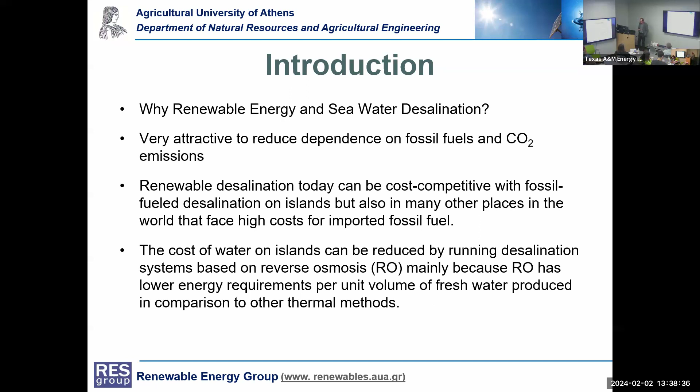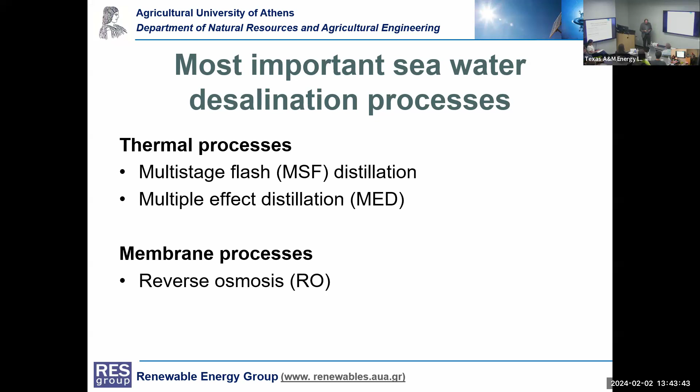The well-known MSF distillation, already implemented for many years, and the distillation principle is, of course, the way of working with thermal processes, and MED. Hundreds of thousands of cubic meters a day of fresh water are still produced in the Gulf and in many other areas, mostly in the Arab countries, with these methods, but not anymore. Because today, the major process in the new systems installed in several areas in the world is mostly reverse osmosis. And I will explain why.

There are also some other processes, but I'm not going to discuss them. Just to explain what reverse osmosis is, you probably know about osmosis. Here, pure water goes through a semi-permeable membrane to this side, where the concentrated solution is. But if you apply a pressure on this side, then you have the reverse process, and water molecules pass through the membrane to the other side. And in this way, you produce fresh water while you have concentrated solution left on the other side. So this is what we do with reverse osmosis.

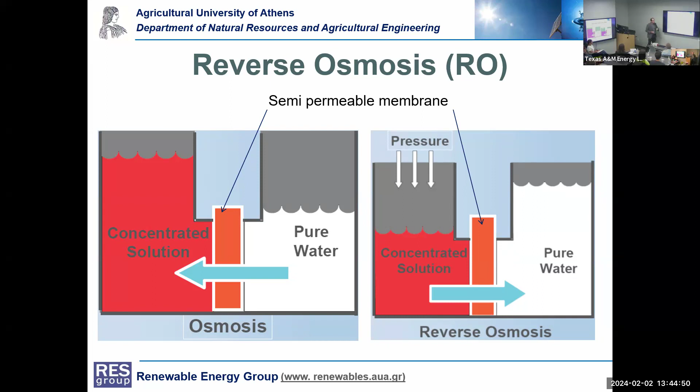And of course, you need pressure, which means energy. So you have to overcome the osmotic pressure in order to produce fresh water. So that's a typical arrangement today of a reverse osmosis system. You have the feed here, feed pump, and then the high pressure pump here. Well, I will explain more about this system here, because this is a very clever system developed something like 10, 15 years ago, the so-called pressure exchanger, in order to reduce the energy consumption of this system.

And this is the membrane module, and you have the saline water here, seawater, for example, and then on the other side you get the fresh water, while here you get the concentrated brine, which is still of high pressure. So you use the system to recover most of the energy contained in the brine. And this way you recover energy and you reduce the overall energy consumption in the system.

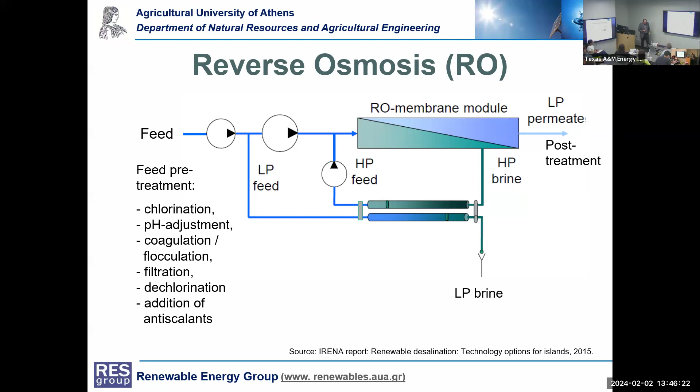Of course, there are also other processes associated, like feed pretreatment or post-treatment of the water. Mostly chemicals are here, but it's not our scope to discuss this today. So as I mentioned, desalination is an energy-intensive process. So you see here the energy consumption in kilowatt hours per cubic meter.

When you want to produce 1 cubic meter of fresh water, you see that if you get water from a lake or groundwater, you need some pumping, or wastewater treatment and reuse. You see how low the average energy consumption is. So if you have water resources, it's foolish to go to desalinated water because its cost is too high.

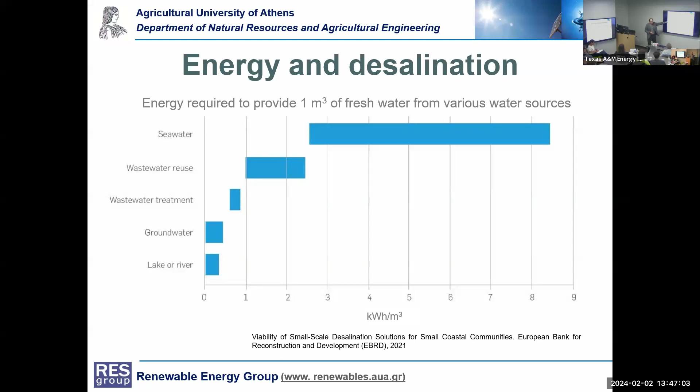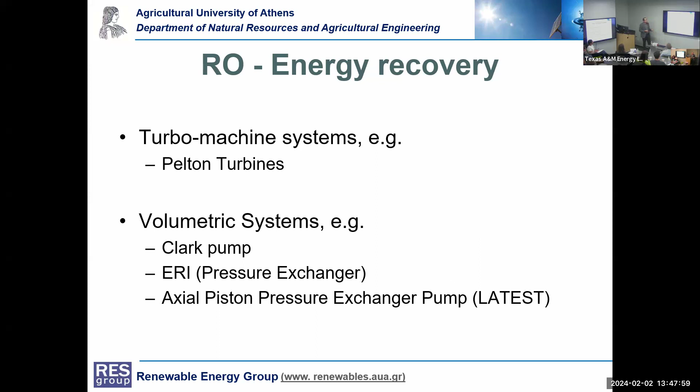Now, how did we manage to reduce the energy consumption specifically for the reverse osmosis systems? There are several systems developed and used today. The first system to recover energy was the system of Pelton turbines, but later on, something like 15 years ago, we had the development of several volumetric systems like the Clark pump that we have been working with, a small system in the laboratory, the pressure exchanger that I showed you before, and the latest system is this axial piston pressure exchanger pump, which is also working very well and managed to reduce the energy consumption quite impressively.

Now, this is the operational principle of the hydraulic energy recovery. This is the Clark pump. So you have the membrane, you need high pressure, and then you get the brine, which is also of high pressure. Let's say that you have here 70 bars. Here you will get something like 68. And then this high pressure is used to move this piston. And in this way, by using this two-way piston as you see, you actually help provide energy to the feed water to drive the salty water, the feed water, to the membrane.

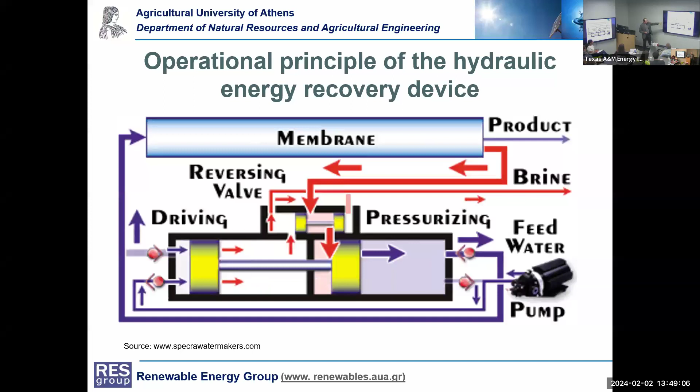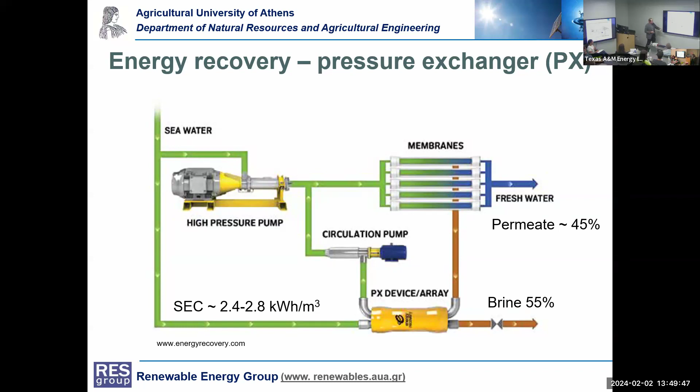So in this way, you recover a lot of energy contained in the brine and you reduce the overall energy consumption. It was a patent by this company at that time for small systems, for yachts, for example, or domestic systems. And then a couple of years later, this pressure exchanger system was developed, the so-called PX, which managed to reduce the energy consumption down to 2.4, 2.8 kilowatt hours per cubic meter. And that was a big revolution in desalination technologies at that time. This system still, of course, exists, commercially available, and in many systems this PX exchanger is installed.

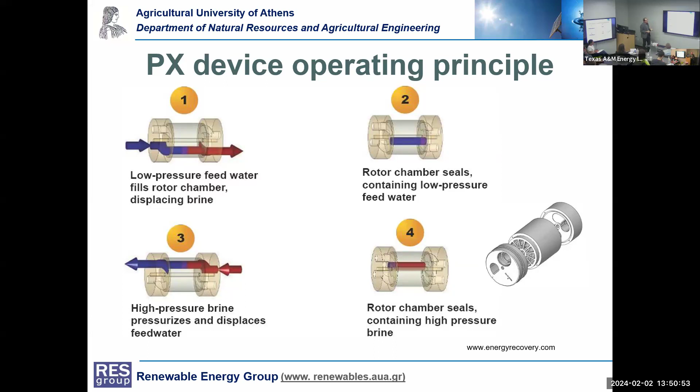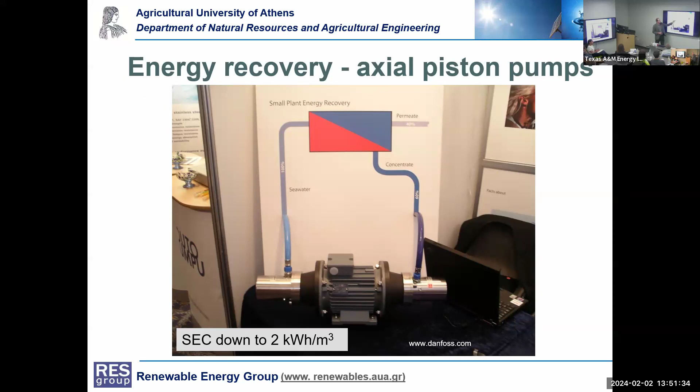With this system, the energy consumption was reduced, and another very smart system is this one, where you have the high pressure pump on the same axis with a very similar pump. These are positive displacement pumps, and one works as a pump and the other one as a turbine. So you get the concentrate here, the brine, and it's the same principle: it helps this pump because it gains energy on the same axis to pump the water towards the membrane.

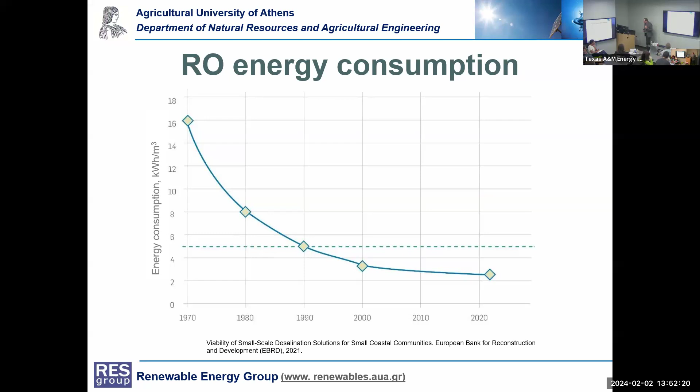And here you see over several years the impressive reduction of energy consumption in reverse osmosis systems, especially in this area. You see how low we are now, below 2 kilowatt hours per cubic meter for the system itself, not the overall consumption, because you have several accessories and other apparatuses that consume energy. But the system itself today, we managed to go down to below 2 kilowatt hours per cubic meter.

And if you compare this consumption with other technologies, you see that the membrane technology, reverse osmosis, now has the lowest energy consumption. And this is the reason why practically all new systems installed everywhere in the world are now reverse osmosis. Another advantage of the technology is that it is modular. So you may install a small system of, let's say, 1 cubic meter a day for a house near the sea, or you can have a very large system of 50,000 cubic meters a day by adding more and more modules. That's a big advantage.

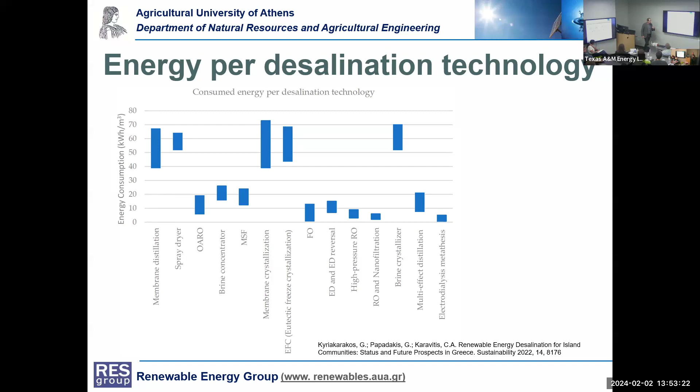Now, regarding the combination of reverse osmosis mostly, or other desalination technologies, with renewable energy, there have been many research trials and demo trials. Many pilot systems have been installed and tested all over the world, trying to combine thermal technologies with many different renewable energy technologies and sources, like geothermal energy, of course solar energy, not only electricity production technologies like photovoltaics, but also thermal technologies, and also others, like vapor compression.

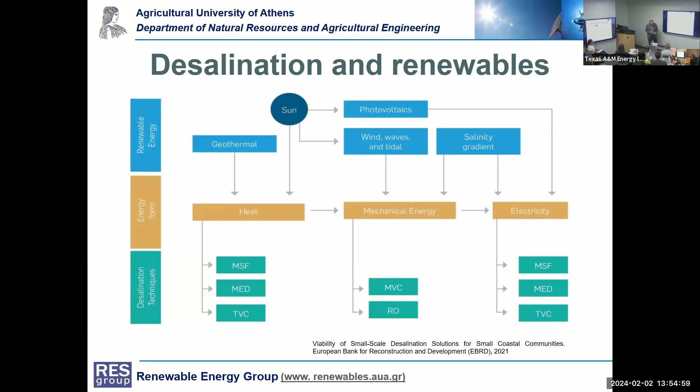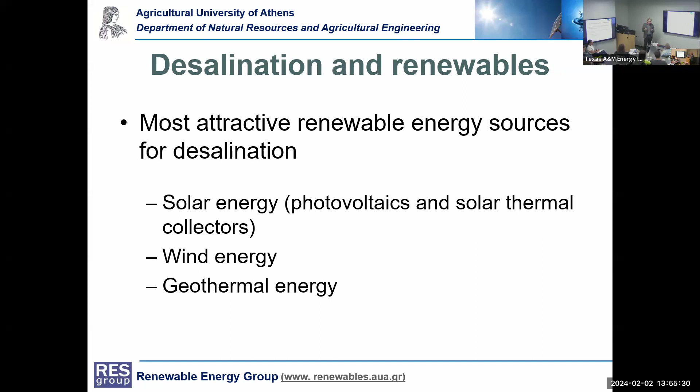However, after all these research and demonstration trials, it seems that photovoltaics or wind, and specifically electricity production renewable energy technology, seems to be the most appropriate for providing power to reverse osmosis, which is now the dominant technology in the world. Nevertheless, when you have available geothermal or another source of free heat, as Professor Hassan mentioned yesterday, then of course you have to consider technologies other than reverse osmosis.

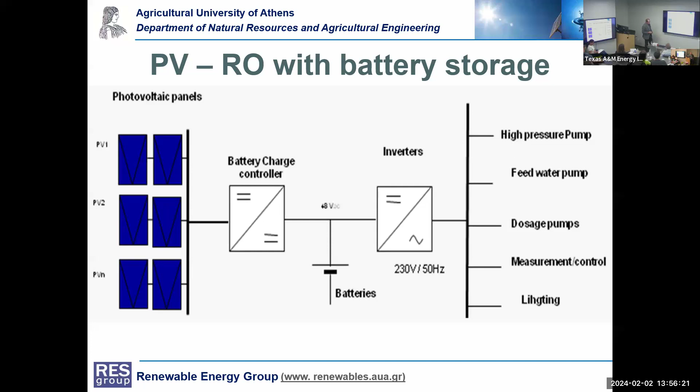Now, this is a typical layout of a combination of PV and RO. We have the panels, we have a battery charger. You may charge the batteries, and then you have the inverter, and then you have the loads. This part is really typical. It's a typical autonomous photovoltaic system, and you combine the load, which is a reverse osmosis system. So there is nothing innovative about that, but it has been used today in many places in the world for small-scale autonomous systems, not connected to the grid.

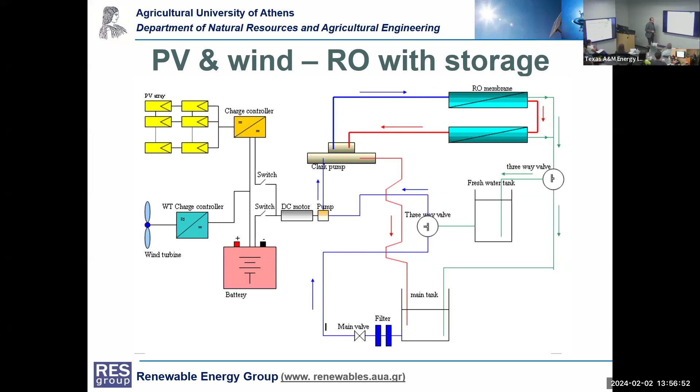In the laboratory, we have been testing photovoltaics and small wind, with all kinds of combinations, with a DC motor or through a Clark pump for energy recovery, to test the reverse osmosis system. But we have also participated in several research projects in many places in the world, including Europe, but also North Africa. This system, one of the first installed some 10 years ago, was for brackish water, not seawater, inland in a village in Morocco.

And you know what is the problem there? The problem is how to treat the brine. If you have a system near the sea, there's no problem. You just return the brine to the sea. Of course, there are standards and knowledge on how to do that without any impact on the sea environment. But generally, there is no problem getting rid of the brine in the sea. But here you do have problems. So this is still an unsolved problem for large quantities of water.

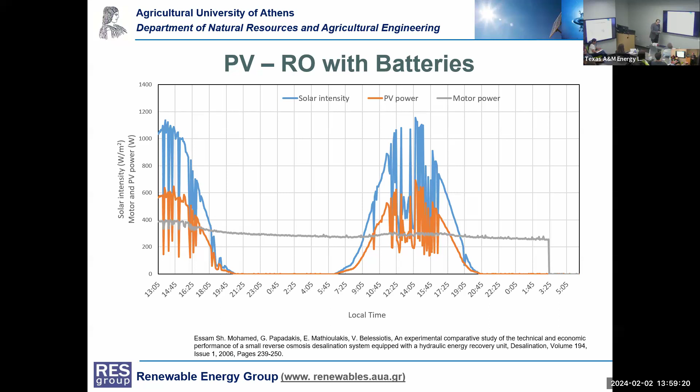So when you combine PV with RO, batteries are still expensive. If you want to lower the cost of fresh water, you might want to get rid of the batteries. So we started doing tests with a battery. Solar radiation intensity is the blue, PV power for a small system, and this is the motor power of the desalination system. You provide all the energy by the battery, so if you have enough battery, the system can operate even for 24 hours. But the idea is, let's suppose you install a reverse osmosis system without a battery and pump the water you need when the sun is available. So you store water instead of storing electricity.

Then what will happen? It's inevitable that the motor power will follow the available power from the PV system, so you have these variations in operation. And the inlet membrane pressure also varies and practically follows the available power. According to the membrane manufacturers, this is not good for the membrane. But nobody has proven that. And Vangelis is still working on that with some cells. He didn't give many details in his presentation, but you can discuss more with him if you are interested.

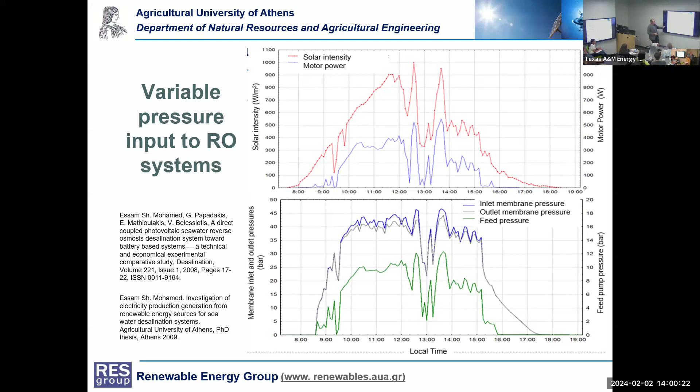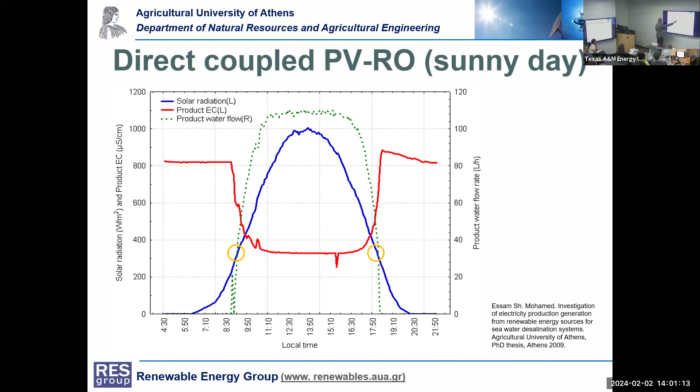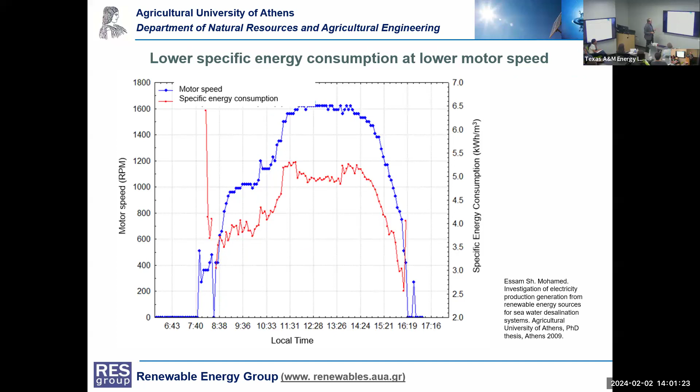Now, there are also other issues when you don't have a battery. The system starts late because there is not enough power in the morning to operate the motor, and also stops at sunset. The motor will operate at its nominal power at a certain point of the day, and you will have some energy that is lost during that time. On a nice sunny day, you will have more power available than the motor requires. So you have to do something about that, and what we thought is to include a kind of buffer for the system to operate.

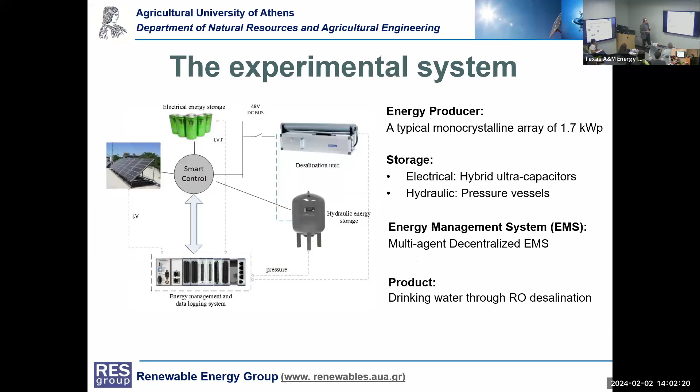So we actually tested an electrical buffer, but we didn't use conventional batteries at that time, lead acid, but we chose to use hybrid capacitors with small storage, exactly to smooth out these fluctuations, and also a hydraulic pressure buffer with pressure vessels, and developed a special control system to operate the reverse osmosis system at the optimum point, depending on the energy available from the photovoltaic system.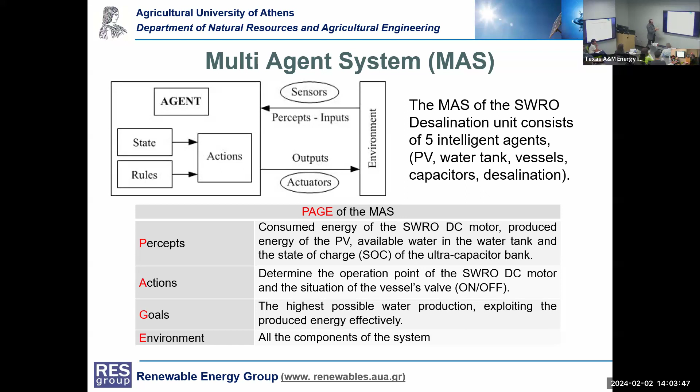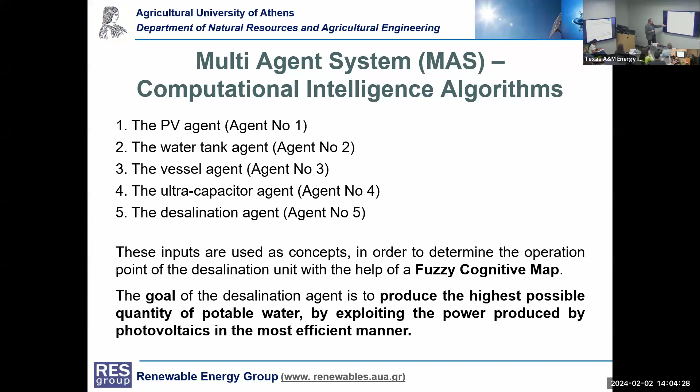And we have used computational intelligence algorithms. So the several agents, the PV, the water tank, because you remember that the idea is to store the available energy in a tank, in water, and provide that water during the hours that there's no sun, there's no energy. And with this system, we managed to operate the system in a very effective way, I would say. So I give you some results shortly for a clear day and a cloudy day.

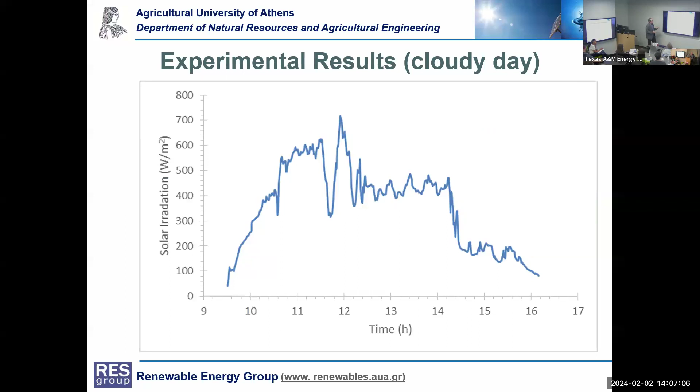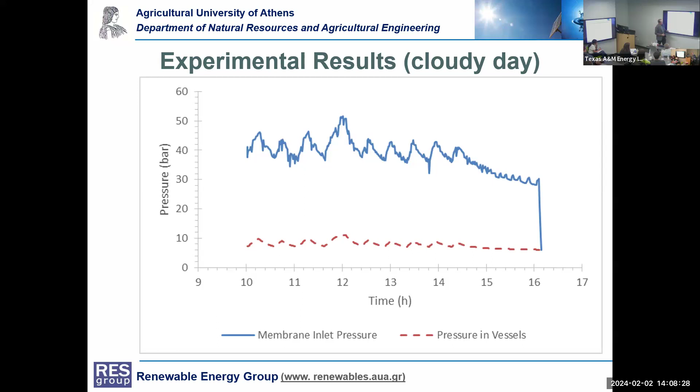And this is the variation of the conductivity, which is within, let's say, acceptable limits during the daytime. So it produces water that can be potable. And now you see that in this case, there is some energy provided by the vessels, the red line.

And what about the energy consumption? You see it's quite high for this small system; well, this was expected. So during a clear day, you have production of something like 550 liters, while during the cloudy day, of course, lower. But the energy consumption is very close during these 2 days. And that's the energy consumption.

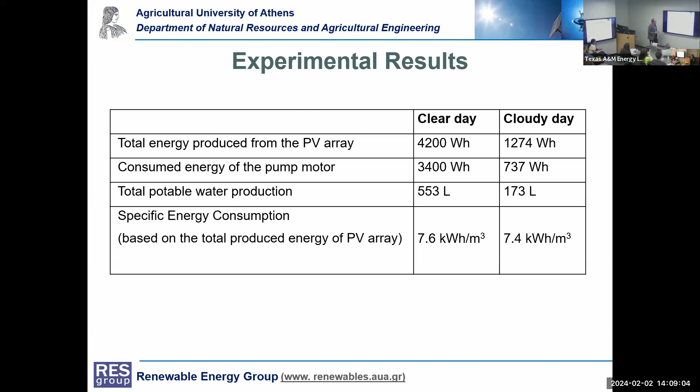So the conclusion from this project is that the incorporation of a short-term storage for a direct connection system, for an autonomous system, and an intelligent control results in significant benefits. That is, more water production than a simple direct connection of the system without storage.

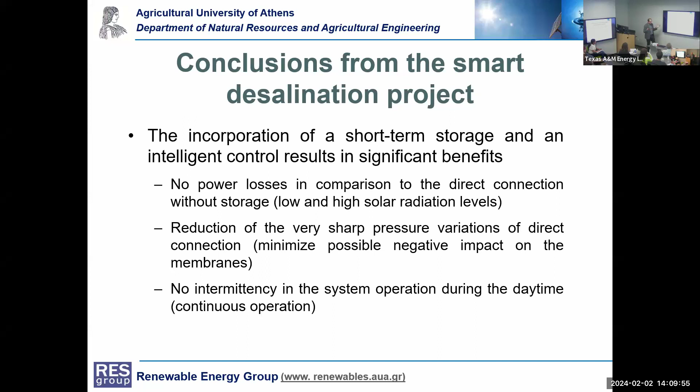And also the pressure variations are reduced, which probably is beneficial for the membranes. And there is no intermittency in the system operation. That is, there is no zero production of water during the whole daytime, even during cloudy days. You still have water production, even small quantities.

The next step is to consider incorporating a reverse osmosis system in a microgrid. So there was a European project and we installed such a system in Egypt. So this is a wind generator here. It was a hybrid system with photovoltaics. And this is the two-phase grid with which we supplied some power to some villages, some houses over there.

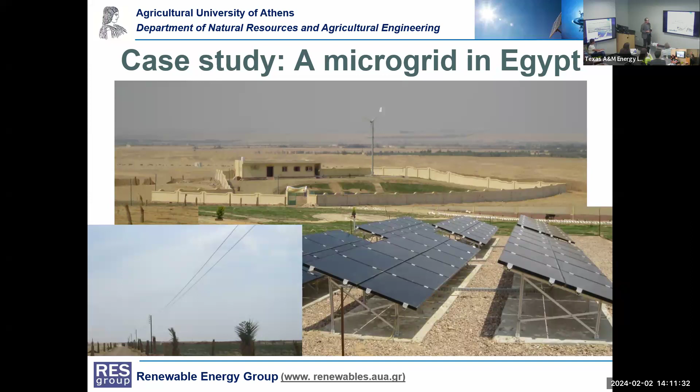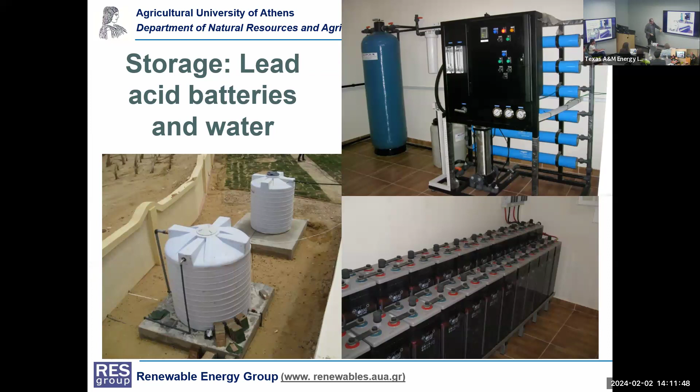Now, we have developed a special control system; Mr. Karavas at that time did it as part of his PhD. And you see the layout of the system, and this is the energy management system. This work is now being continued by Vasilis. And as you see, according to the calculations, which were tested partially experimentally in that system, you may have water stored during the whole period of the year, along with providing electricity to other loads.

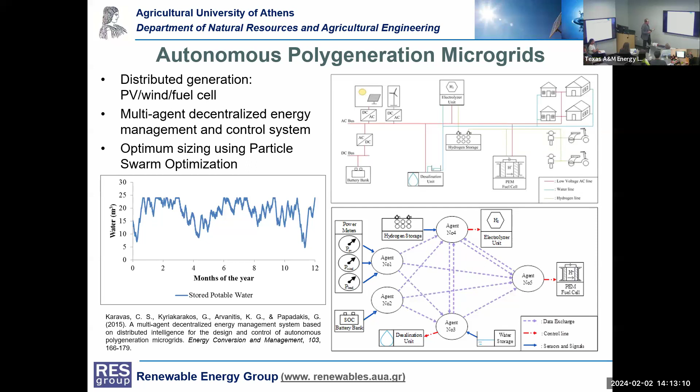So the purpose of the control system was to provide electricity and water through this microgrid to the people or to a community that wants to have power and water.

So the conclusions were that desalination is an attractive means of storing energy in the form of water. It offers possibilities of increasing renewable power penetration in weak autonomous grids, such as those of the islands. And excess electricity produced by renewable energy can be used to desalinate water. So that's the idea, to use in microgrids or in larger grids the water as a means of storing energy.

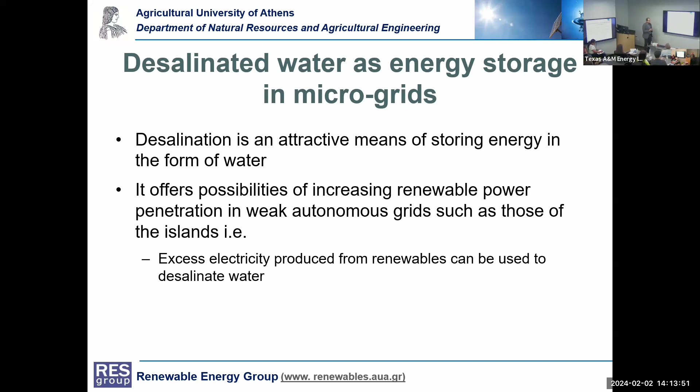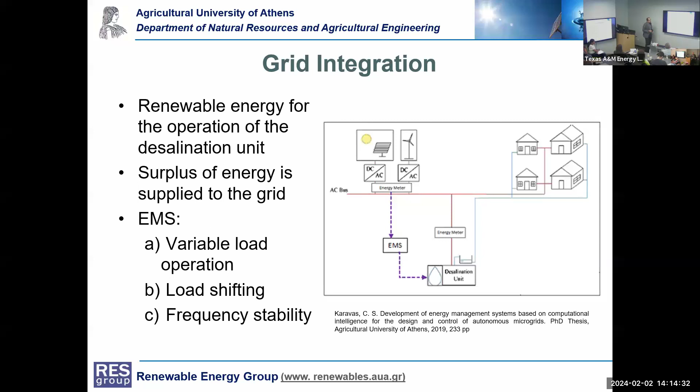And with the smart energy management system, you can operate the desalination unit at variable load. You can achieve load shifting, and you can also assist with any problems of frequency stability by operating the desalination unit at variable load.

In addition to these trials, we've been testing membranes theoretically, doing some calculations and also some tests. Vangelis is doing this work. He mentioned a few things during his presentation. So he's developed a model to predict if there will be any scaling on the membrane. Scaling for reverse osmosis means you have salt deposition on the membrane that blocks or reduces the freshwater production. And according to the calculations Vangelis has done, it seems there will be some effect.

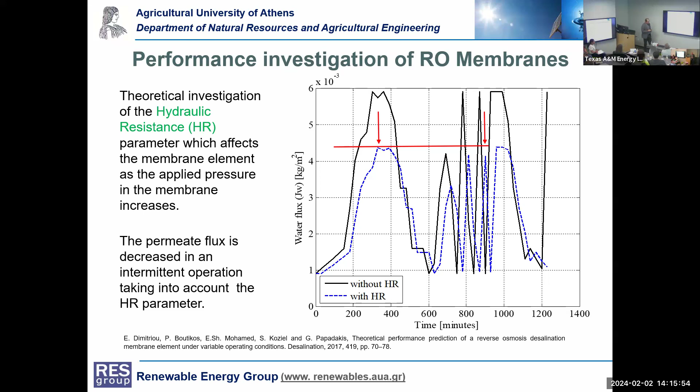This is not yet really proved, if I'm correct. I mean, there are some other groups that work on these issues. This has not been proven yet, but anyway, we have to check on that.

And we are also testing the possible influence of feed water temperature on the reverse osmosis performance. Why? Because as I mentioned, desalination is now implemented in cold areas in the world where the seawater can go down to 5 degrees or even less, if I remember well. In that case, you see that there is a strong influence of the water temperature on the reverse osmosis performance.

For example, you see here that the specific energy consumption is quite higher when the water is cold; lower than 20 degrees, it goes up, while if you are over 20 degrees, then it's okay, it's quite low. And the temperature also influences the productivity of the system.

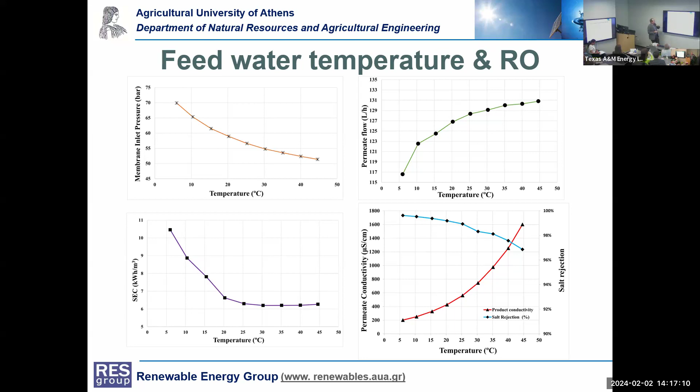So after all these investigations we have done and following the study for the bank, we concluded that today, according to the technologies available, we can have these three options. We can choose one of these three options according to the local conditions for supplying power of combining renewable energy with reverse osmosis desalination.

So the autonomous topology that we have been discussing already, the RO system is powered exclusively from renewable energy system, either through direct connection, without energy storage, maybe with a small storage, or with a full battery array to support the operation of the system, probably even for 24 hours a day. But this has a considerably high cost today, mainly because of the cost of the batteries.

In the semi-autonomous topology, the RO system may be powered by the renewable energy system, equipped with a battery storage, but surpluses of energy may be supplied to the grid. You can sell electricity to the grid, or shed it if the grid cannot absorb it and the batteries are full, but it depends on the design of the system. And any additional power required by the reverse osmosis system may be taken from the grid. If you need to produce water and there is no power available, you just buy electricity from the grid.

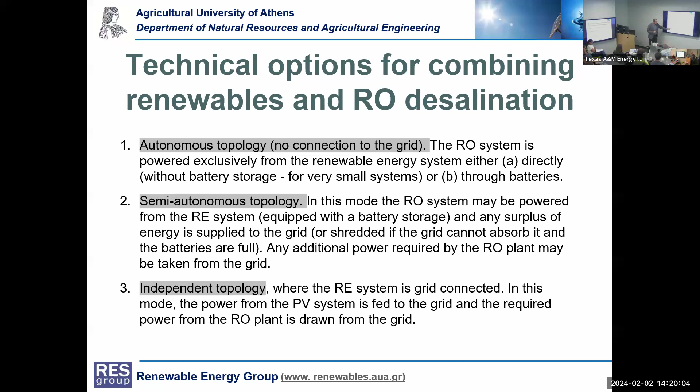And the independent topology, which is the topology that has already been applied, both for photovoltaics and wind, where the RE system is grid connected. There's no physical connection of the renewable energy system with the desalination system, but the energy produced by the renewable energy system is meant to satisfy the power and the energy required by the reverse osmosis system. So you buy and sell electricity, and this electricity is actually used for the RO plant. I don't know if I'm already late.

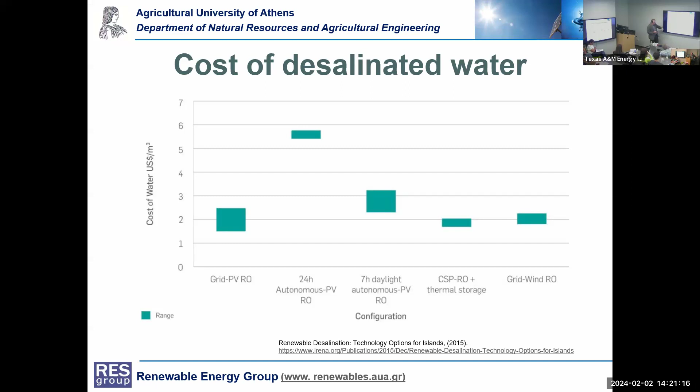From an earlier study in 2015, you see that this topology seemed to be at that time the most beneficial one. And actually, from what we calculated just a couple of years ago, you see that this topology, the so-called independent, in fact this net metering, has now quite impressive results, but this is for the conditions in the market of Greece. We took into account the cost of electricity in Greece and so forth.

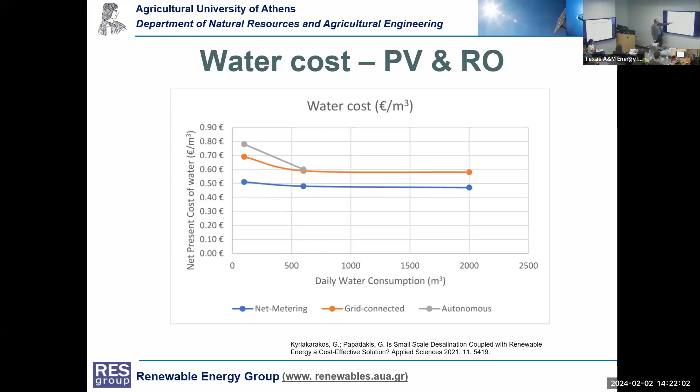So you see that even these topologies produce water at quite low cost. So it is feasible to apply today, implement renewable energy reverse osmosis systems.

And this is a commercial case from Milos Island in Greece, where you have the reverse osmosis system. The capacity is something like 3,360 cubic meters per day. The electricity is provided by wind generators, two actually, of total 600 kilowatts in this small island. It receives many visitors during the summertime. The water was not enough.

And the investor decided to install 2 additional wind turbines to satisfy the energy required by the plant, although the local grid was already full. I mean that when you have an island grid, there is only a small percentage of renewable energy that we can install because of the safety of the grid. So this was already saturated, but it was allowed by the grid operator to install additional wind turbines just to satisfy the additional electricity required by the reverse osmosis system.

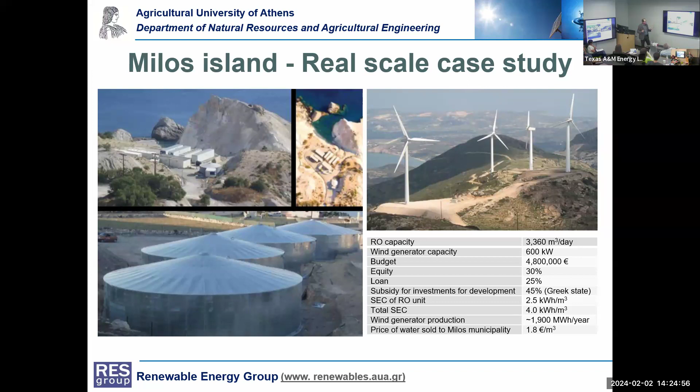and that's a very successful investment project in Milos Island. And as I know, larger systems have already been installed in the Emirates with large photovoltaic systems with a net metering topology. We're going to investigate short-term energy storage now using lithium-ion batteries. And of course, Vangelis is going to continue his investigation with these special cells of the membranes to see what will happen to the membranes with long-term variable operation, to see if there will be any effect. Thank you very much.